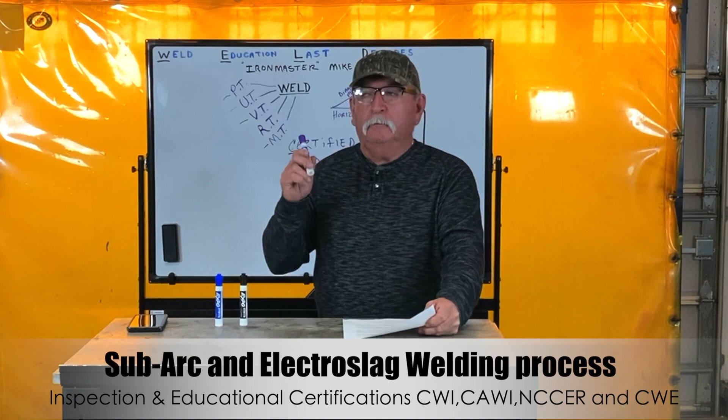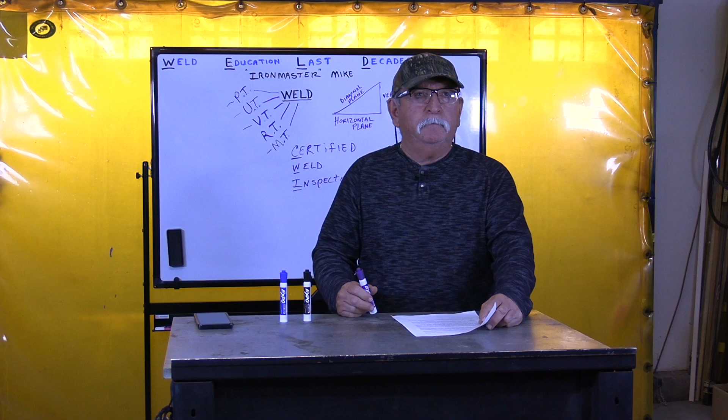I've been a certified welder since 1982. Started out welding, went in as a welder, saw these guys with the blueprints, and I told them I could do that, I could lay out, fit it, weld it. And they said, well, you know, we got rules. I said, you know what, I'll do it for free. Don't give me no raise, just let me do what I can do. See if you like it. If not, I'll go back to welding.

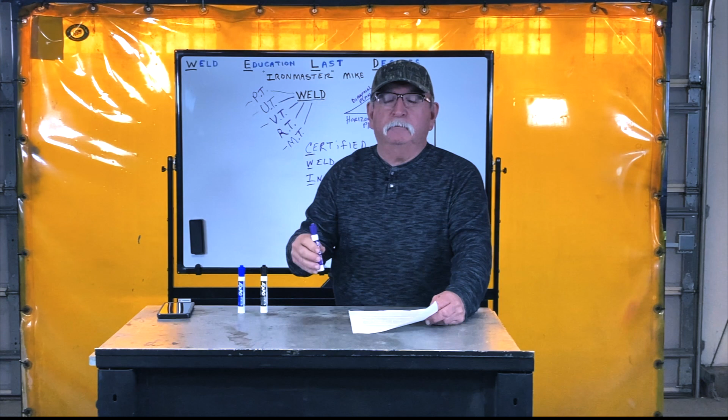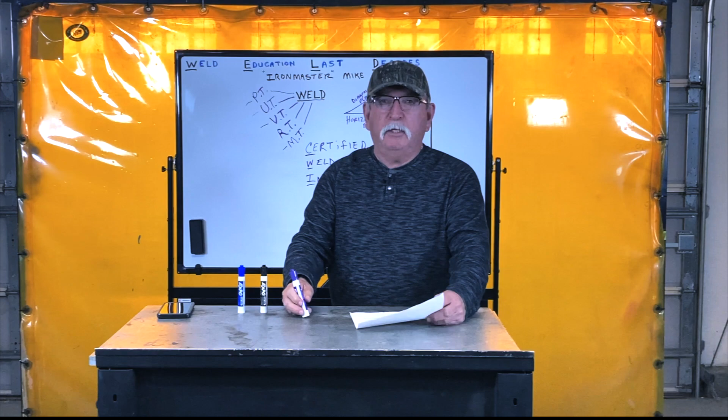Well, I showed them what I could do, what I've learned. They moved me up - actually I moved myself up because I didn't just sit back and settle for just one section of welding. I taught myself to read the blueprints, figured them all out, learned the lingo of the engineers.

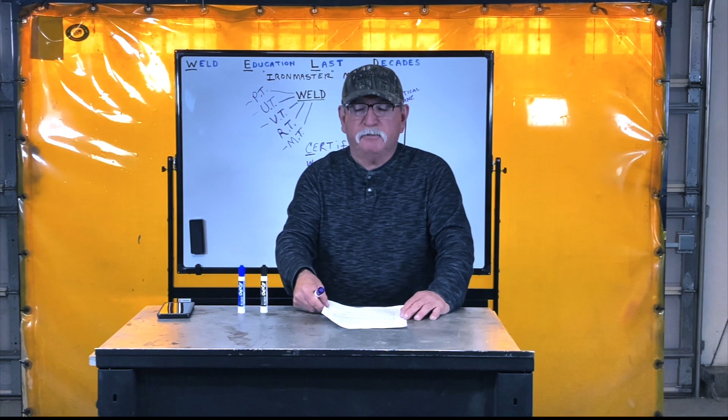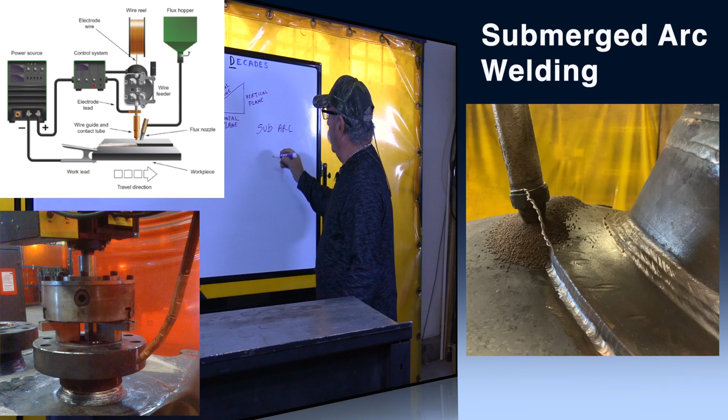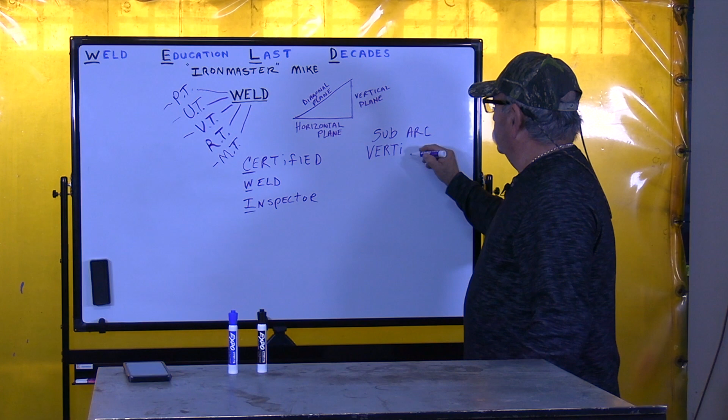So then I went to my second job, and they taught me so many weld processes I never did learn them all. You got sub-arc welding. There was a new process that I was sent to the Lincoln plant in Ohio to learn - this thing was called VertiShield. With VertiShield, there's another one which is really interesting, Electroslag.

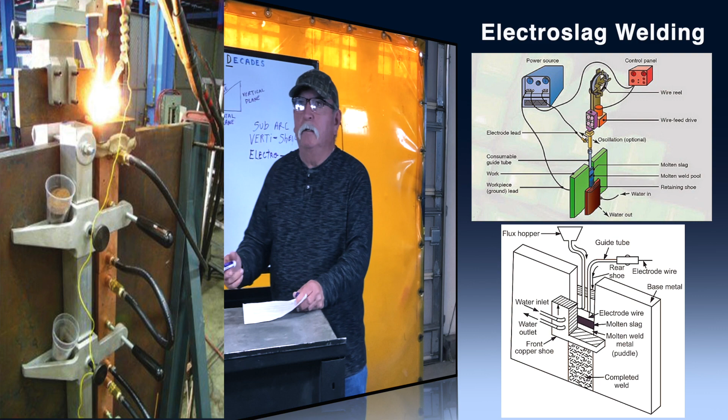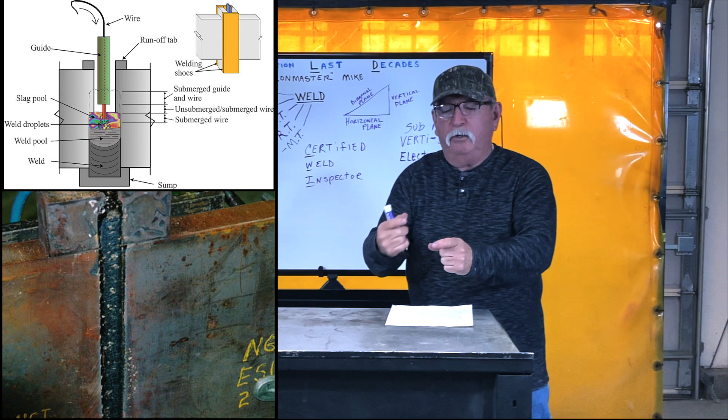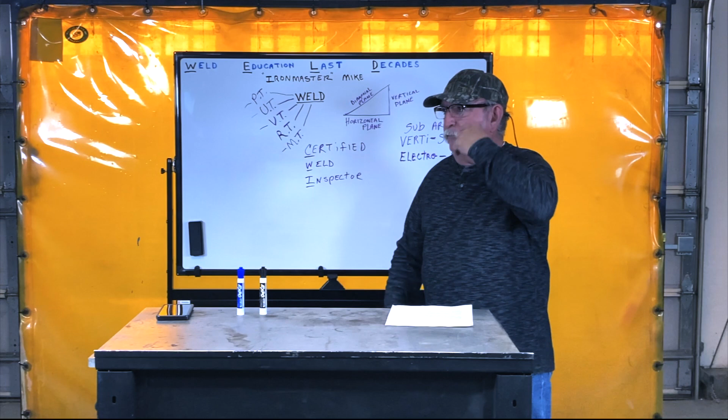This process is very unique. I read up on it, I checked it out. They had old machines - Electroslag was designed in Russia. What they do, Electroslag is made for like a butt joint, but with a keyhole, in very thick plate. We would weld 3-inch thick plate because they only came in, what, 4 foot by 6 or 8 foot slabs, so we had to put them together with this process.

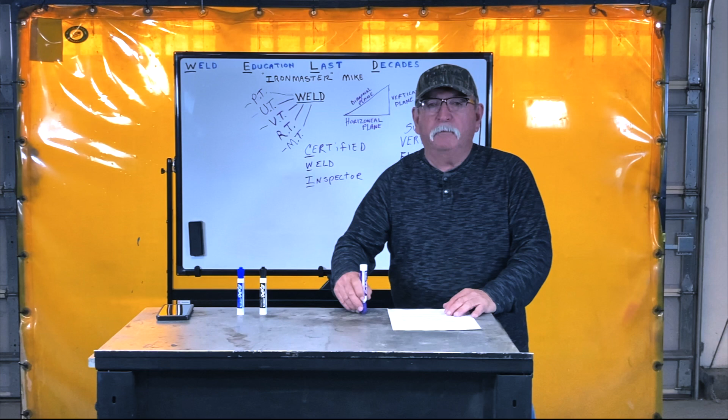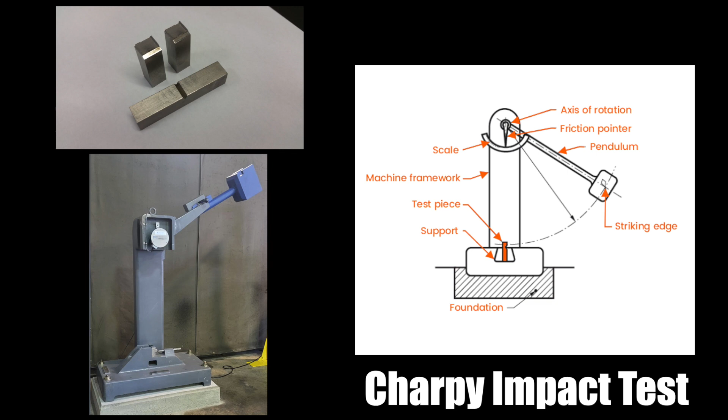We had to make the weld procedure and get it to pass. When they do a weld test of that size, it's very extreme - we're talking impact testing, pull testing, X-ray, UT, all of them combined. So when you're doing procedural weld tests, they get very intense.

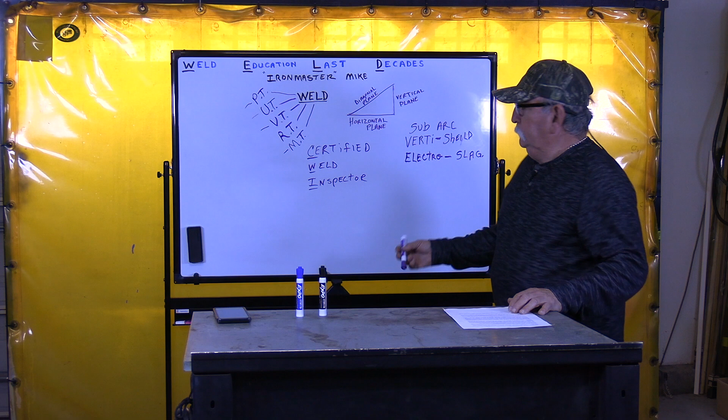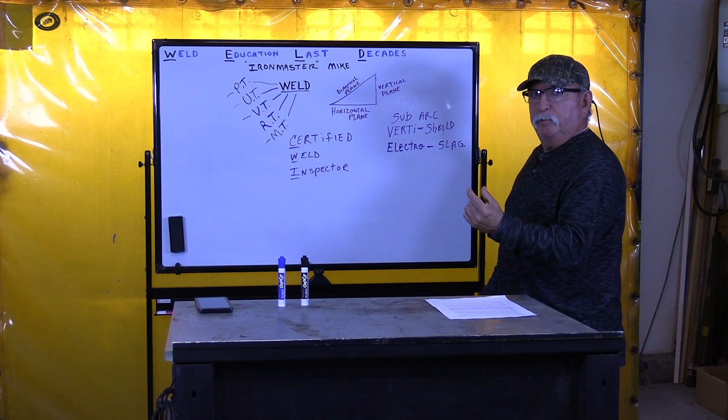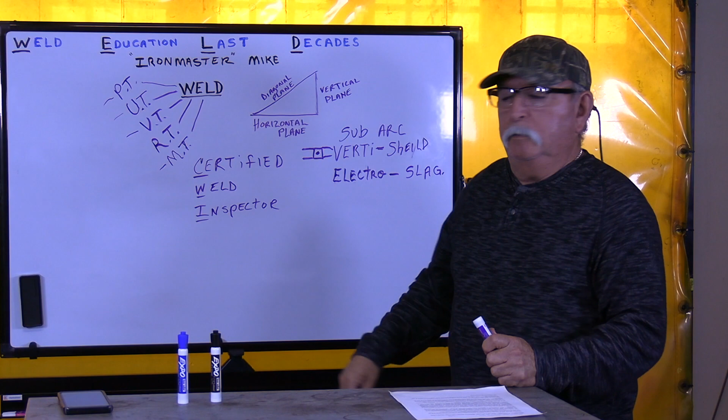But Electroslag is actually the same as VertiShield. VertiShield is a small process for smaller plate, same concept, but only about 3/4 inch to 1 inch plate with a square keyhole. So this one had a square keyhole, and you had your plate, and it would have a rod go in with a wire, flux cored wire running through the middle. The rod was a consumable rod. Same thing as Electroslag, exactly the same thing, but the scale is so much huger.

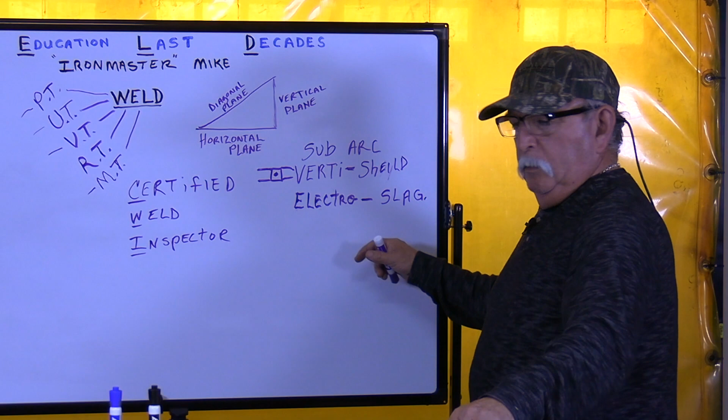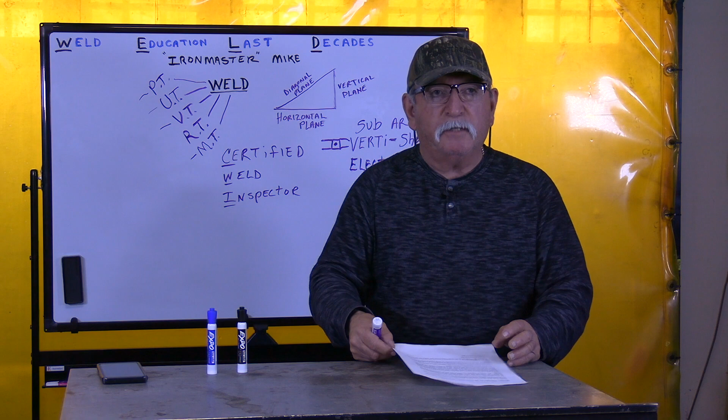So like everybody, when you start out welding, you're starting out with stick, and you pretty much have to, because that's where your hand-eye coordination gets developed. But there's so many processes you have to learn - learn them all. If you have the opportunity, learn them all.

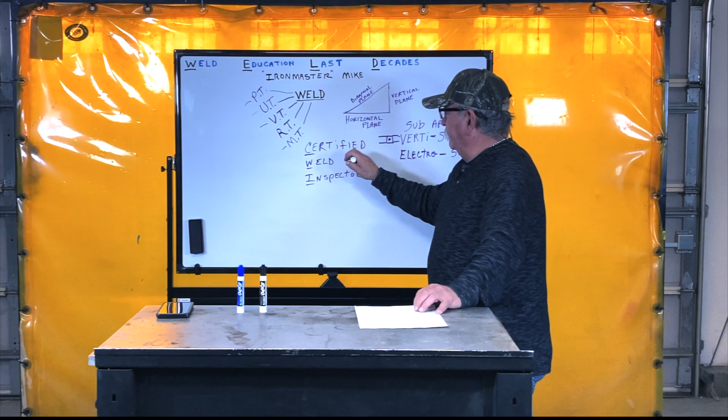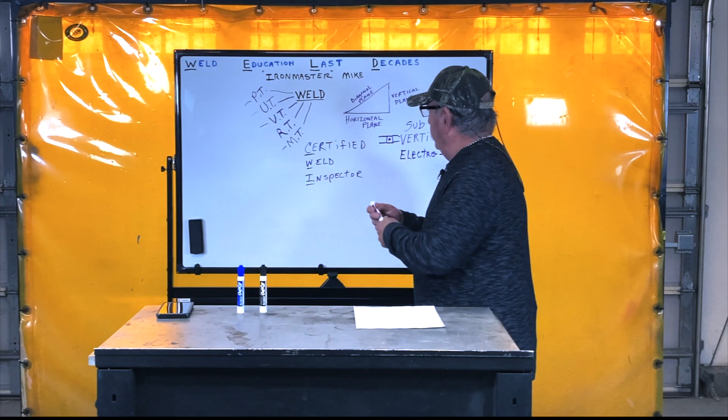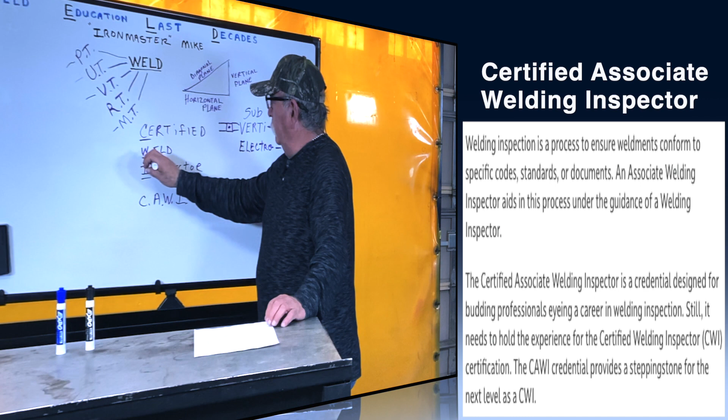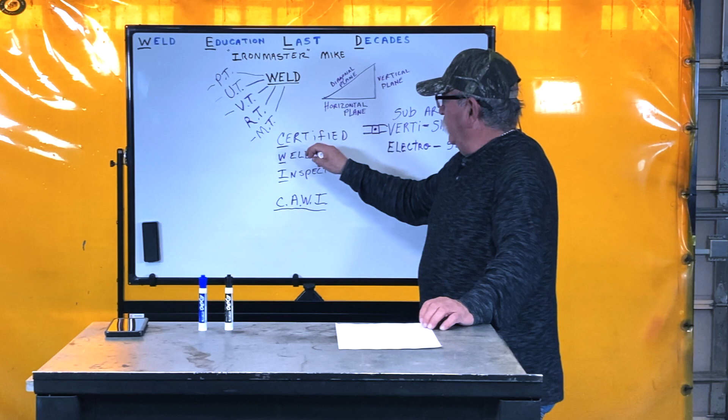So also, like I was saying before, there's a certified welding inspector exam, and I've taken it a couple times. There's 2 levels - the CWI. So this one here is Certified Associate Welding Inspector. This one here overrides the CAWI, the Associate. You can do all the same work, but only the CWI can sign it off.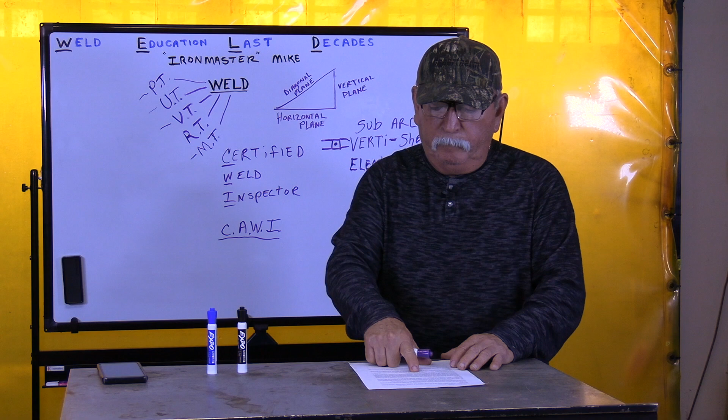Then there was a new course I took, the last one, called NCCER. That one was a craft course, it was for teaching. So your craft could be welding - they had different areas, but I took the one for welding so you can teach welding. But what they do, they have books, but they leave it up to you based on your background and knowledge on how you want to teach.

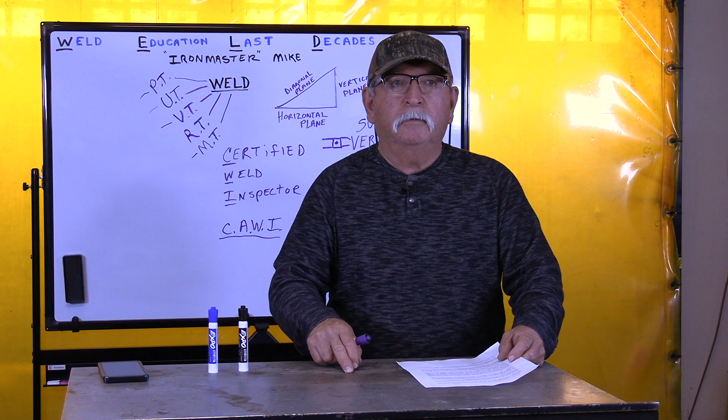Because they leave it up to you, because you got there somehow, you know, and you take this test and they want you to show people how you work, how you got to where you got to be. So the last place I worked at was a school - I was a welding instructor for a school, which is fun once you get to the level of being able to teach people everything you know.

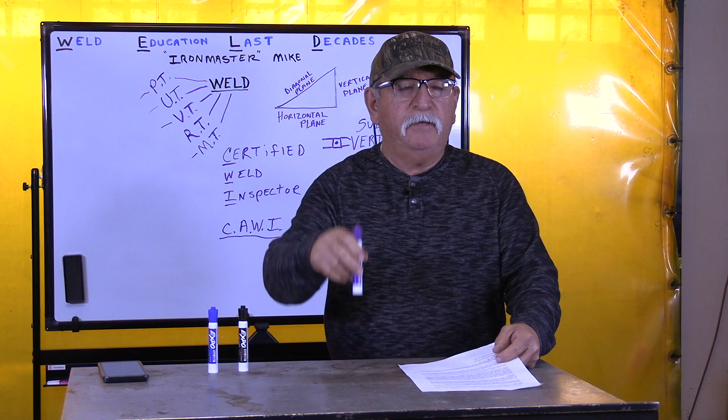And I've always pushed that one point - make yourself an asset. I've told these guys, young people, you know, you want to get a job in welding and you want to just stay there, that's what you want to do your whole life - learn everything that applies to that weld.

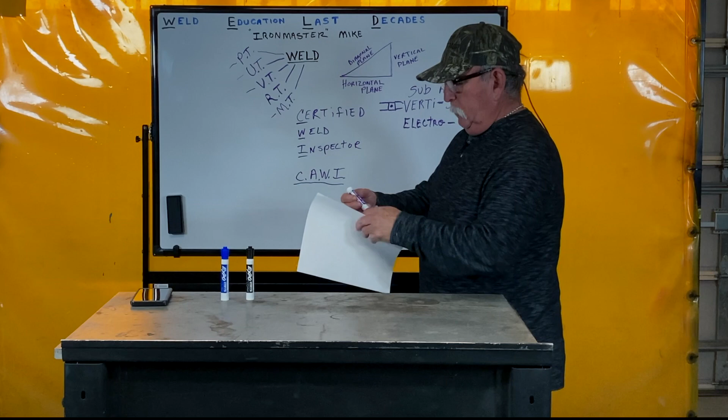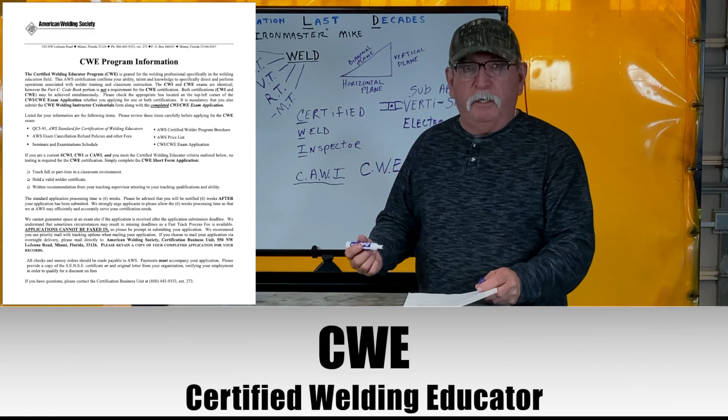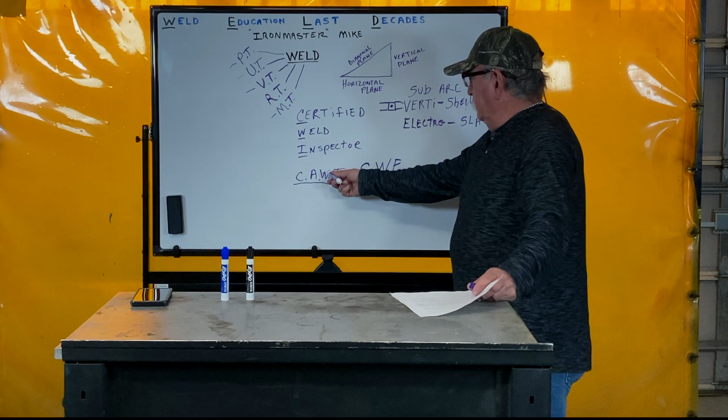On the inspection part, this CWI overrides the CAWI. But there's a separate one which I had - it's the CWE. So this one there is a Certified Welding Educator. If you want to end up teaching, you could apply after you try out for these, get one of these. I had the CAWI for like 12 years or something like that. And then while I was doing that, I got my CWE because I was training people at work, and that's where that came in handy.

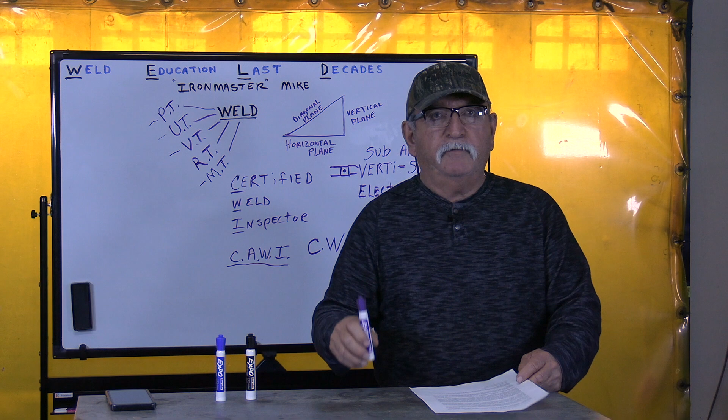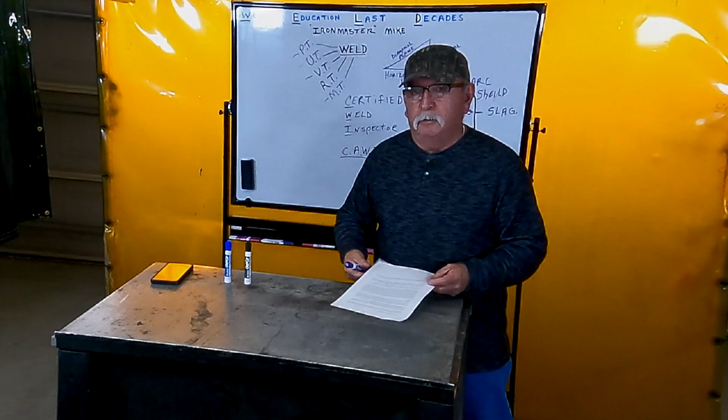And you'll get questioned - there was outside companies going, okay, what's this guy know? What's this guy know? Boom, boom, boom. They want to find out if you're able to do the work. Big companies like British Petroleum - I had an inspector to work with on some jobs there, very picky.

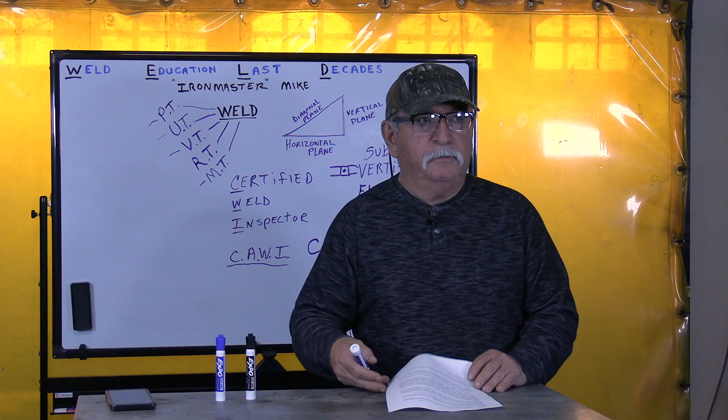But I would check the work and go through and patch up everything before he got to see it, and he found minimal items. But I mean, I was glad to do something like that - they trusted my work and my ability to do my job.

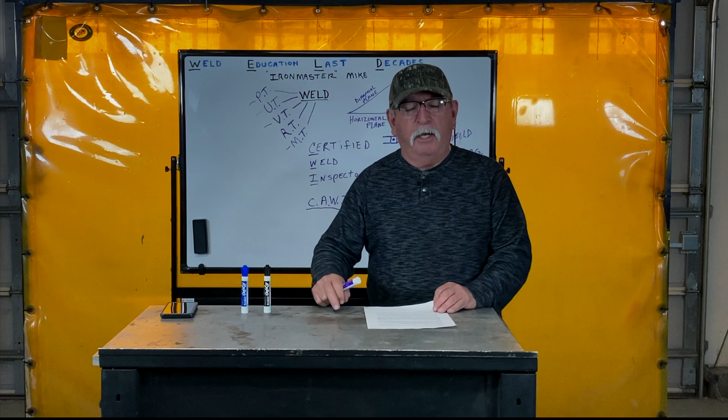And that's where you want to be - you want to be above everybody that's applying for the same job you're going to apply for. So the more you know, the more it's going to help you. And like I said, I keep saying it again - make yourself an asset, not just an employee, and you'll be surprised.